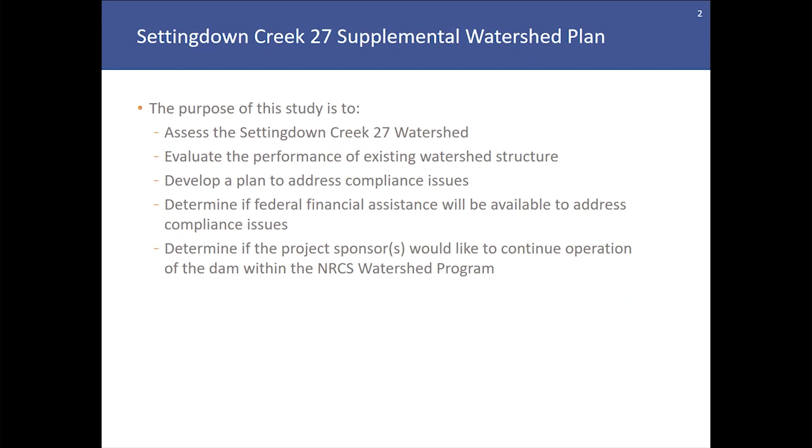As part of the study, public participation is very important. The objective of the public participation plan is to inform the public and watershed stakeholders of the planning effort. The planning study requires a series of public meetings. 2 public meetings have already been held and included a brief history of the NRCS watershed program, a brief history of dam safety, considerations for dam design, operation, and maintenance, an overview of the Settingdown watershed and dams that are included in the study, and the solicitation of questions and comments for scoping topics and project opportunities and concerns.

The second public meeting identified some potential rehabilitation alternatives for the dam. The first public meeting was posted to Schnabel's YouTube channel from August 7th to August 17th, 2020, and the second public meeting was posted from December 18th, 2020 until January 4th, 2021. Please note that the first and second public meeting presentations are being reposted with this third presentation to our YouTube channel for those who are interested in viewing the presentations but were unable to do so during those allotted date ranges described above.

This third presentation will discuss the following topics: a review of the Settingdown Creek watershed and the dams that are included in the planning study, a review of the existing conditions associated with the dam, and the presentation of 3 shortlisted alternatives that are being considered by the planning team. At the end of the presentation, questions and comments will be solicited from you, the viewer, and other stakeholders, and we'll give you instructions on how to do that.

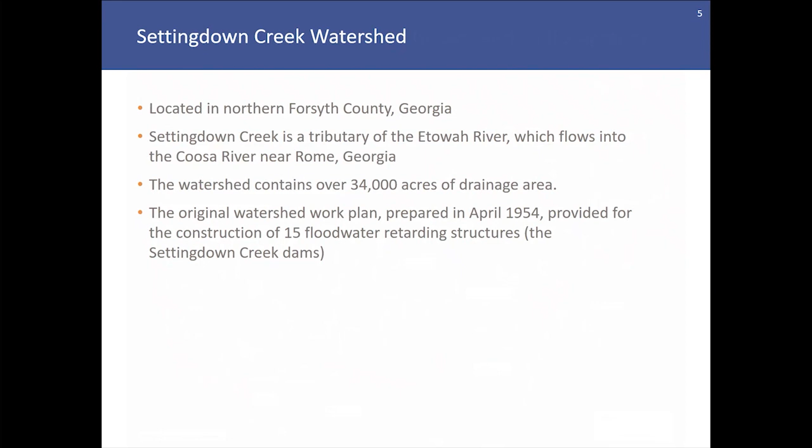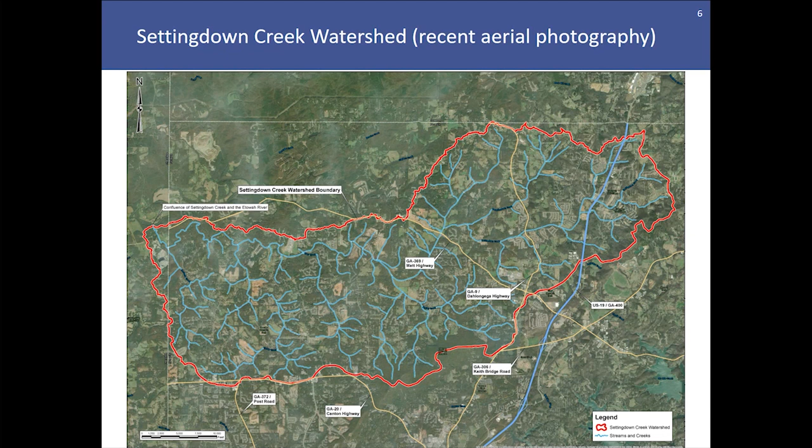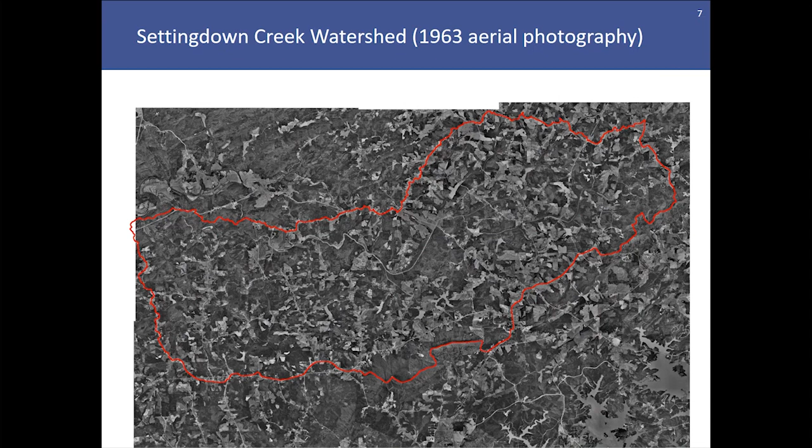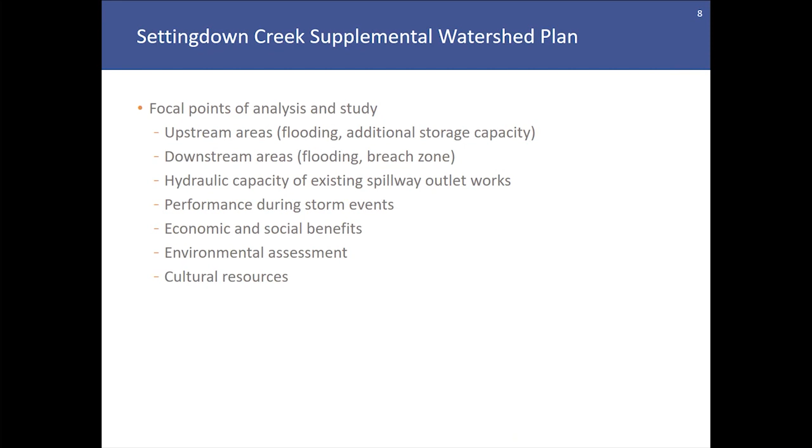As part of the watershed planning initiative, there were several focal points of analysis and study. The planning team looked at upstream areas to assess flooding and the need for additional storage capacity in the lakes. We also considered downstream areas for flooding associated with storm events, as well as hypothetical breaches of the dam. The hydraulic capacity of the existing spillway outlet works was also evaluated for performance during various storm events. An evaluation and analysis of economic and social benefits provided by the dam, as well as an assessment of environmental and cultural resources were also performed.

Some items of note for Settingdown Creek 27. The dam meets Georgia Safe Dams Program criteria to be considered a Category 1 high hazard potential dam. This means that failure or improper operation of the dam would likely result in the loss of human life. The dam requires an operating permit from the Safe Dams Program. Previous assessments indicate that the dam does not comply with current SDP rules and requirements.

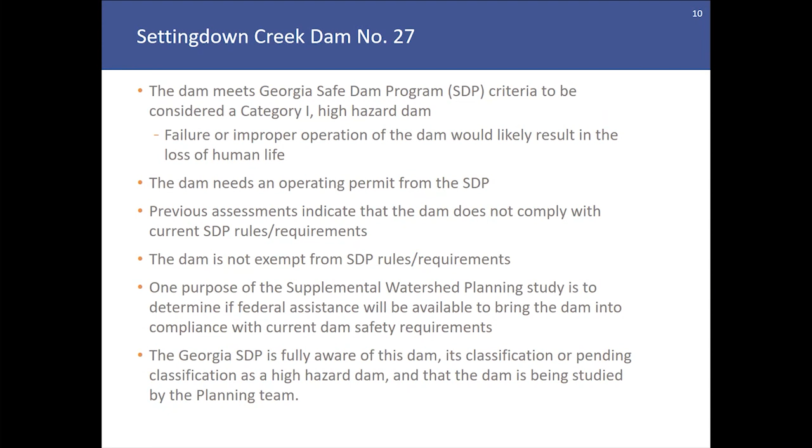The dam is not exempt from SDP rules and requirements, and a purpose of the planning study is to determine if federal assistance will be available to bring the dam into compliance with current dam safety standards. The Georgia Safe Dams Program is aware of this dam, its classification as a high hazard dam, and that the dam is being studied by the planning team.

Some original design features associated with the dam are that it was not originally designed and constructed as a high hazard dam. Some development has occurred downstream since its original construction, which has necessitated an increase in the hazard classification. The dam is a flood mitigation dam, and an anticipated secondary purpose of the dam is sediment accumulation or storage.

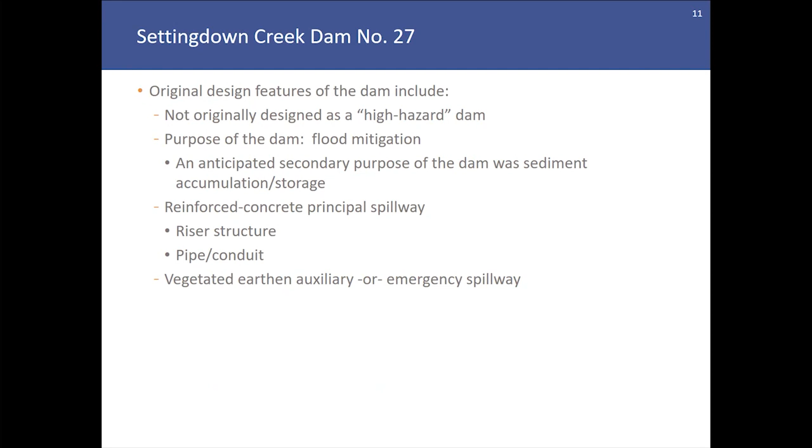The dam spillway consists of a reinforced concrete riser structure and nearly horizontal pipe that conveys water from the upstream side of the dam in the lake through the dam to the downstream outlet channel beyond the downstream slope of the dam. There's also a vegetated or earthen auxiliary spillway channel located near the left end of the dam. And as we'll see in some upcoming slides, Fricks Road, which is a county road, crosses just downstream of the control section of the auxiliary spillway.

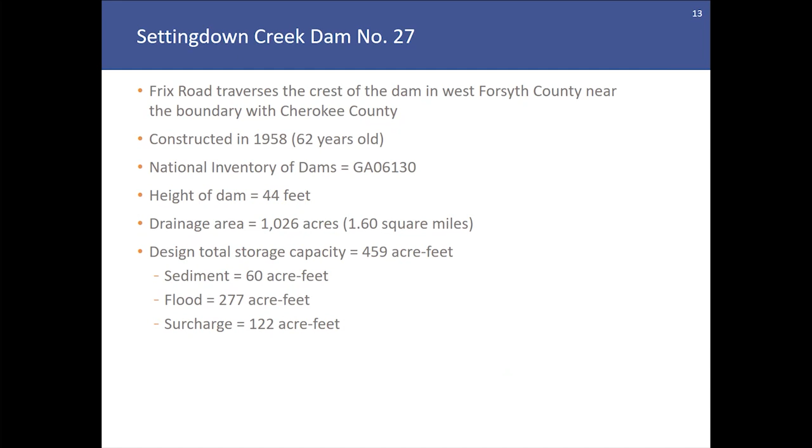The dam appears on the National Inventory of Dams and has a surveyed height of approximately 44 feet. The drainage area to the dam is approximately 1.6 square miles, and the design storage capacity of the impoundment is 459 acre-feet.

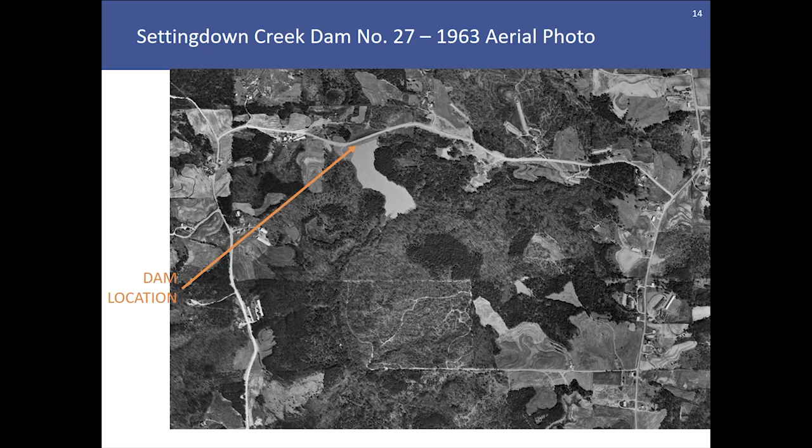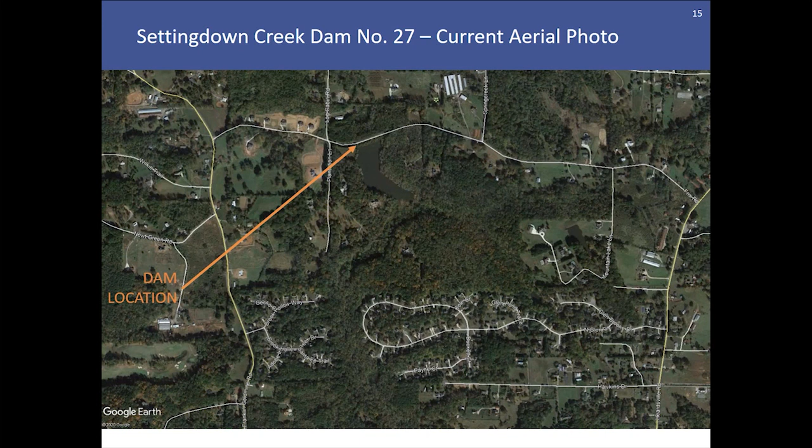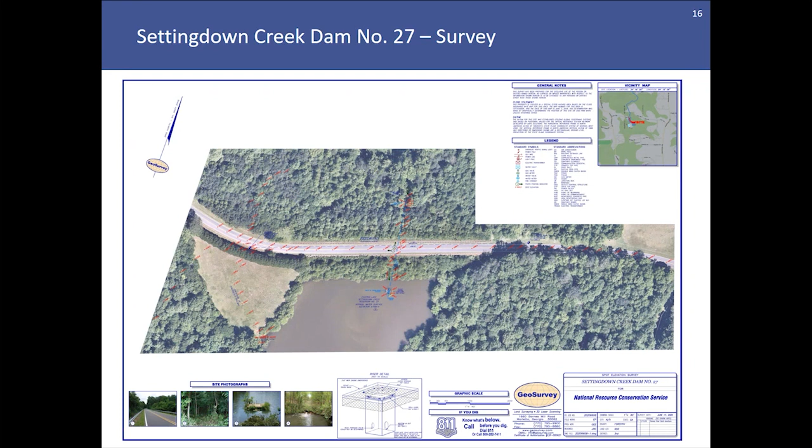The principal spillway riser structure is located in the lake. If you can note the gray rectangle with some survey points located around it. The blue line indicates the approximate alignment of the principal spillway conduit that runs from the lake through the dam to the outlet channel downstream of the dam.

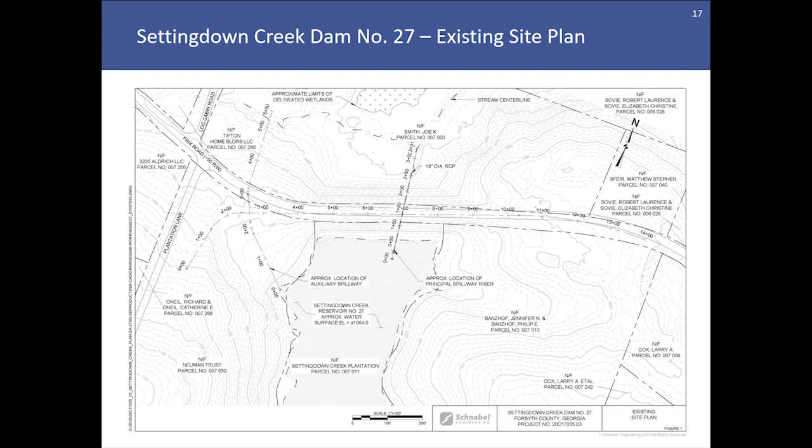This is a site plan with some topographic contours that show the location of the auxiliary spillway, dam, and principal spillway. You can see the location of Frix Road going across the dam and the location of some wetlands that were delineated downstream of the dam. We indicate these wetlands and note that any rehabilitations to the dam or spillway system should not result in impacts to the wetlands delineated near the top of this view.

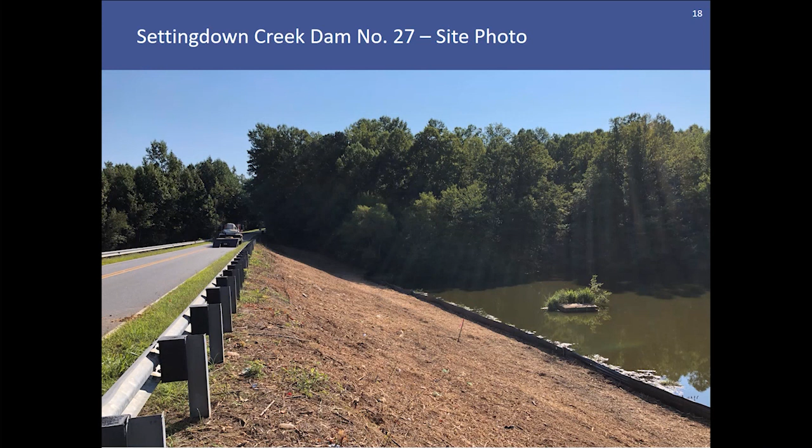Here's a photograph taken from the crest of the dam after the clearing was performed. The upstream slope is in view. Frix Road is at the left side of the view, and the principal spillway riser structure is located in the lake in this view. Note that at the time this photograph was taken, some trees and other woody vegetation were growing out of the riser structure.

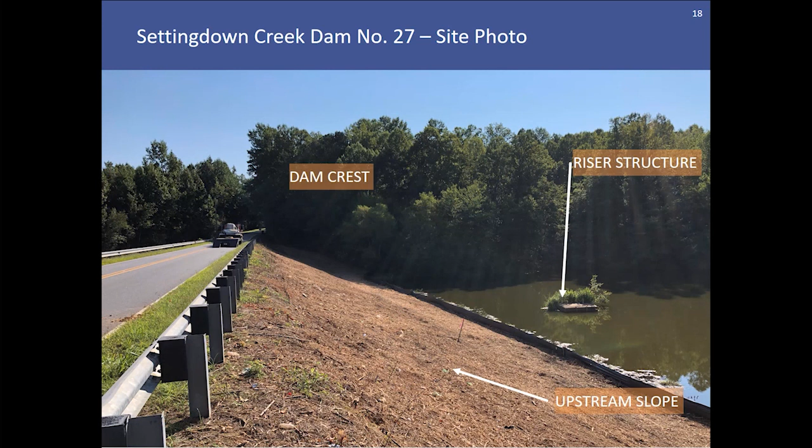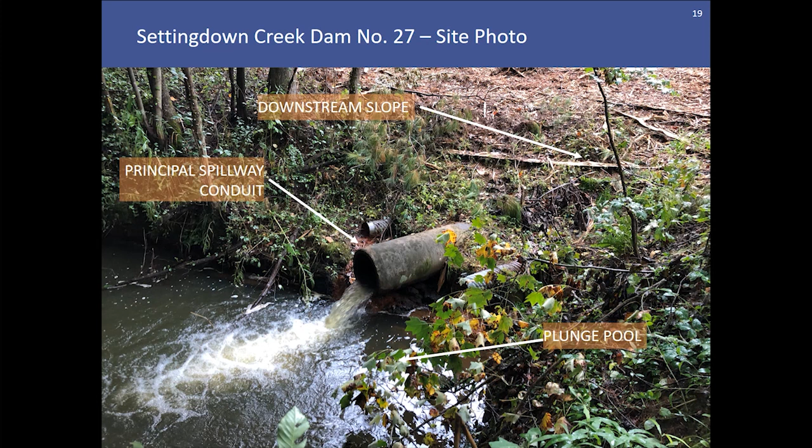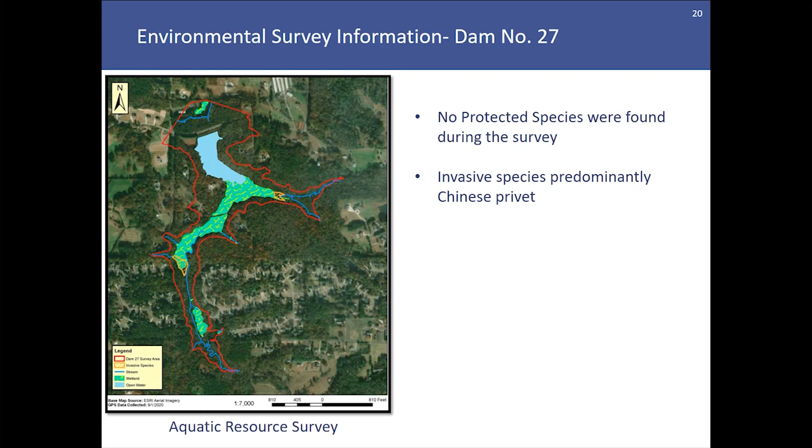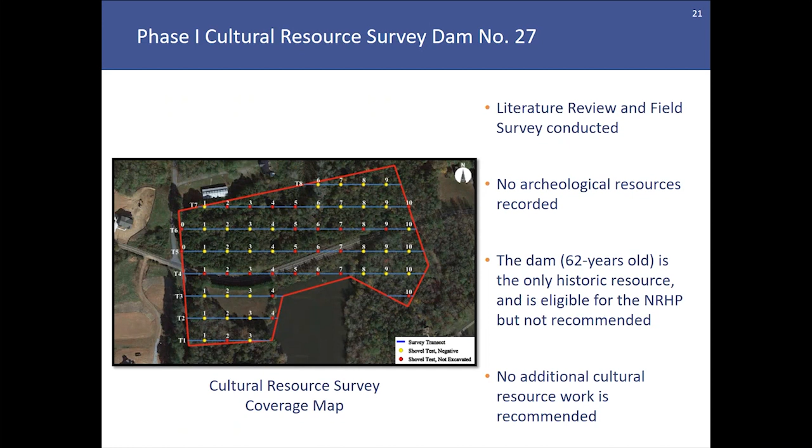The dam, being over 50 years old, is eligible for listing on the National Register of Historic Places, but given that the dam is not a unique structure to Georgia or the United States, nor were any notable feats of engineering performed, listing on the registry is not recommended. The cultural resources team recommends that no additional cultural resources work is required to assess this dam.

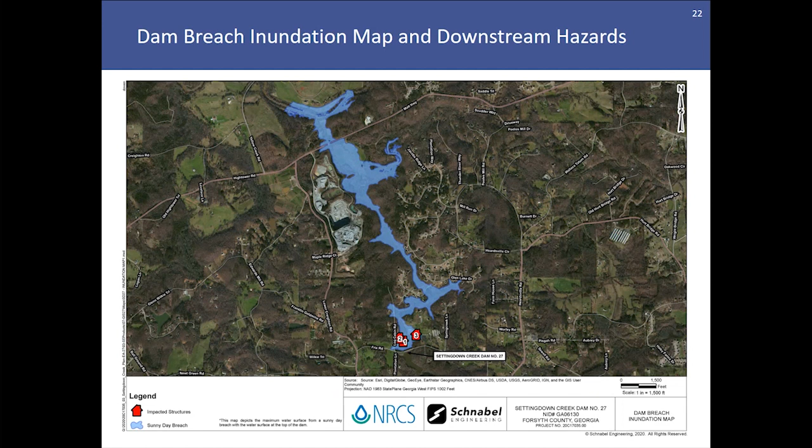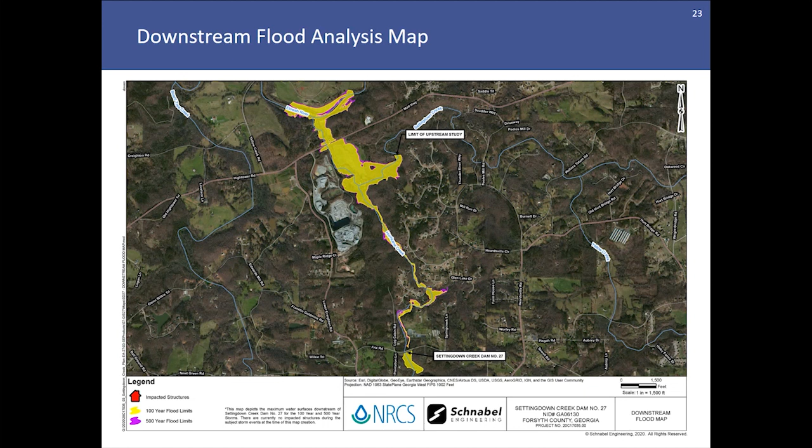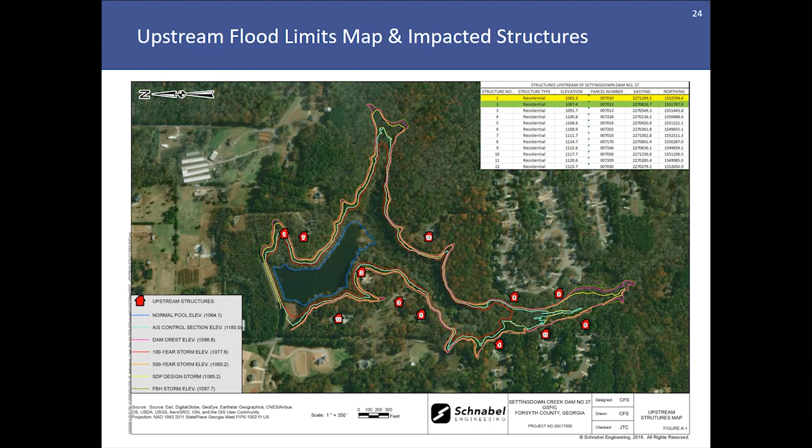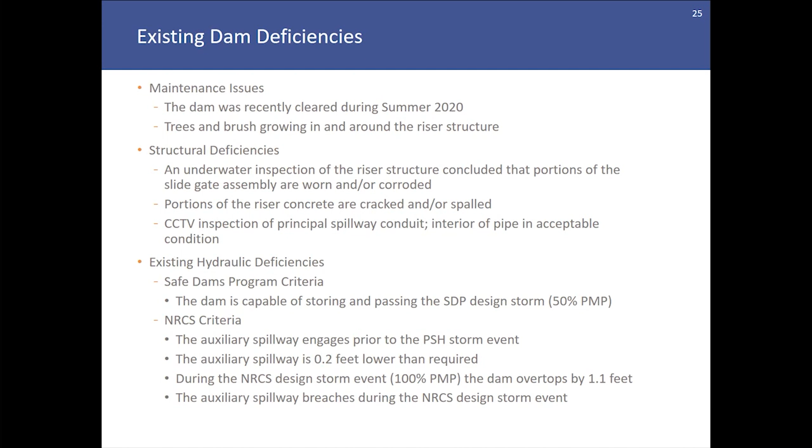The planning team has shortlisted 3 alternatives, which will be discussed in the remaining part of this presentation. The first will be a no action alternative that would assume rehabilitation of the dam to Georgia Safe Dams program criteria and no federal funding necessary or required associated with that option. This option would be the least expensive of breaching the dam or rehabilitating the dam to state criteria.

A decommissioning alternative is required for evaluation as part of the planning study. This would involve permanent removal of the lake by taking out the dam and stabilizing the lake and footprint of the dam after removal. There's also a need to consider impacts to downstream areas with the removal of the dam.

Finally, a future with federal investment alternative, which would be a full NRCS rehabilitation, will be presented. This would involve changes to the embankment, removal and replacement of the principal spillway riser structure, and the decommissioning of the existing auxiliary spillway and construction of a structural auxiliary spillway. As the NRCS rehabilitation alternative was developed, consideration of upstream non-flood controlled ponds and uncertainties with climate change were also considered.

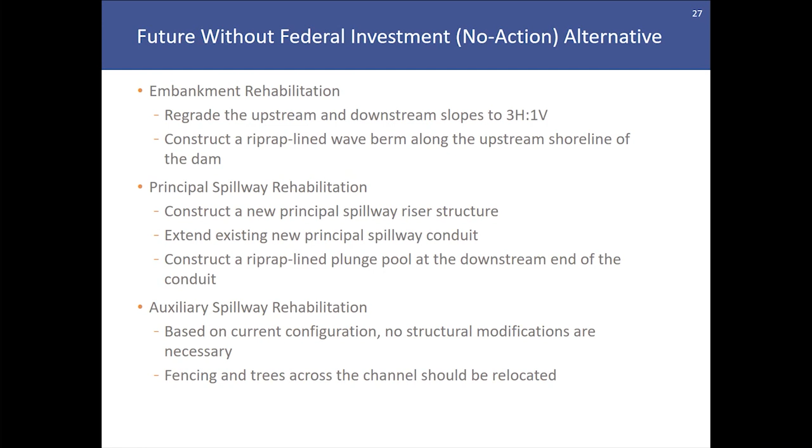However, between stations approximately 200 and 300 on the center line of the dam, trees and fencing that run adjacent to Fricks Road are creating an obstruction of potential flows through this channel, and some consideration will need to be given to relocation of those trees and fencing to remove the obstruction.

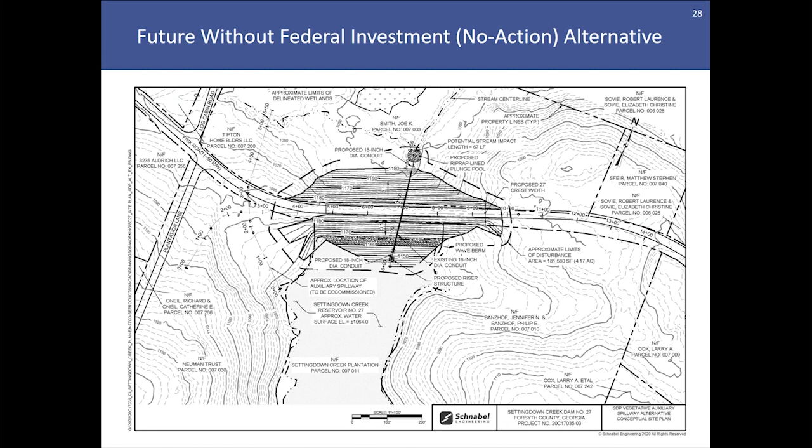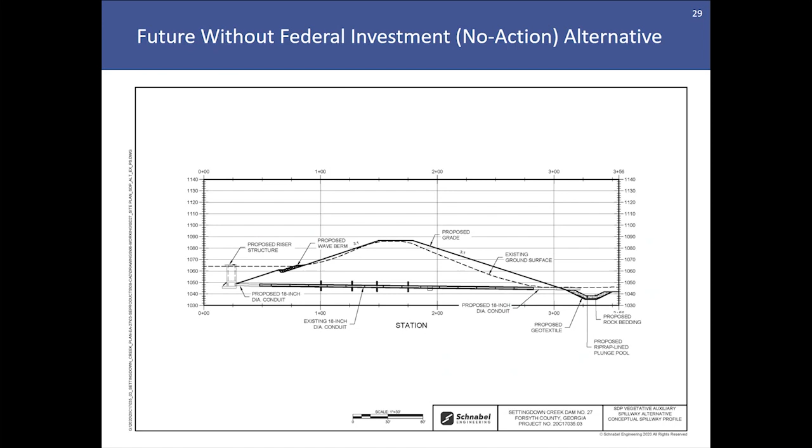Here's a profile view of the proposed improvements to the principal spillway system. As you can see, a wave berm would be constructed on the upstream slope of the dam to accommodate the riprap lining for the wave berm. The principal spillway riser structure would be relocated slightly upstream, and the principal spillway conduit would be extended both in the upstream and downstream directions to accommodate some of these improvements to the embankment and spillway system.

A decommissioning alternative would result in the permanent draining of the lake and removal of the existing embankment structure. This process would involve reconnection of the floodplain to the original grades prior to the construction of the dam, stabilization of the lake bed with permanent vegetation, and stabilization of the primary channel through the footprint of the old dam where stream flows would flow on a regular basis. In addition, consideration to decommissioning the dam would also involve keeping Fricks Road in service. And to do this, the installation of a bridge or a large culvert system would be required.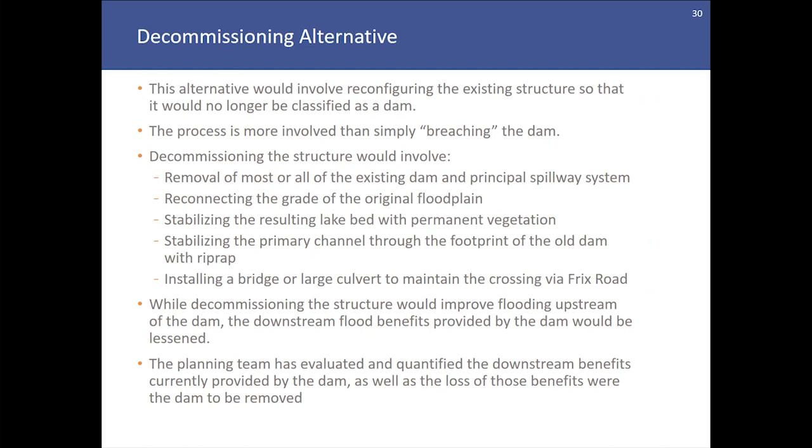Decommissioning the structure would improve flooding upstream of the dam, but the flood benefits downstream of the dam would be lessened or lost. As part of the planning study, evaluations of the downstream benefits currently provided by the dam, as well as the loss of those benefits, have also been considered.

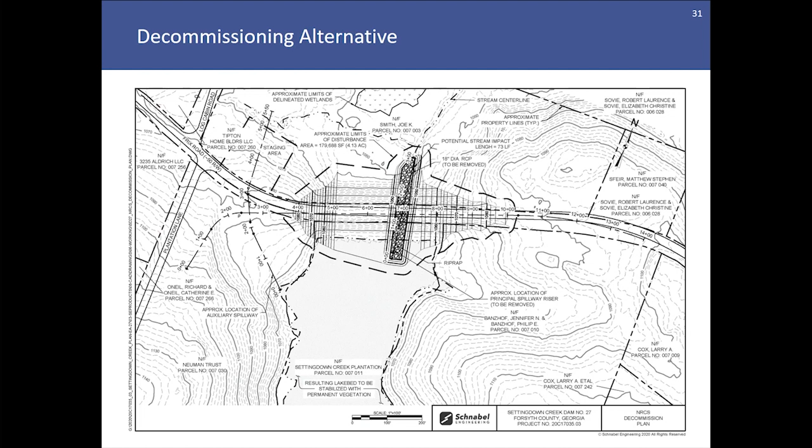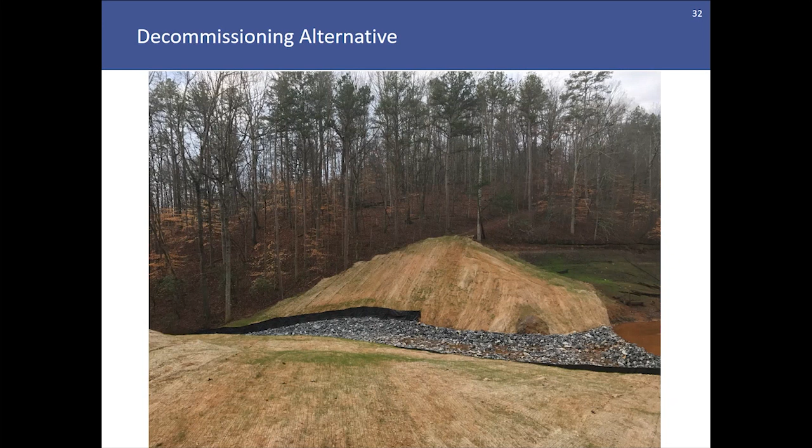Here's some examples of what a decommissioning alternative would look like. You can see that portion of the embankment would be removed. In the case of the decommissioning alternative, the entirety of the embankment will be removed, and the slopes would be laid back. In the case of Settingdown 27, a bridge or culvert system would have to be constructed to keep Frix Road in service. And you can see the riprap lining that would be involved where flows would occur on a regular basis.

The final alternative that we'll discuss in this presentation is the future with federal investment. This would involve a full rehabilitation of the dam to NRCS criteria and would involve raising the crest of the dam to the current maximum water surface elevation associated with the design storm event, regrading the upstream and downstream slopes to 3:1, constructing a riprap lined wave berm along the upstream shoreline of the dam, and decommissioning or closing off the existing vegetated auxiliary spillway.

The principal spillway riser structure would be removed and replaced with a new structure, and the principal spillway conduit will be extended into the lake slightly further and also in the downstream direction. A riprap lined plunge pool would also be constructed at the downstream end of the principal spillway conduit.

The structural spillway for the auxiliary spillway system would consist of a 90-foot wide reinforced concrete labyrinth crested chute spillway. This would have 3 labyrinth cycles, and this spillway is what would be required to pass the flows associated with the more intense NRCS storm event.

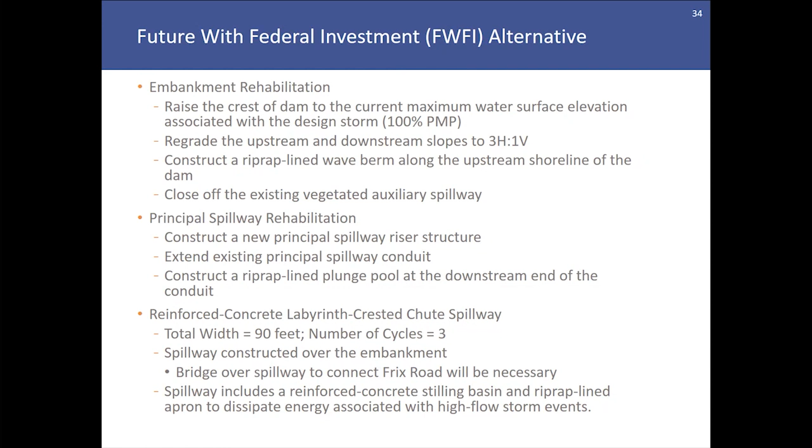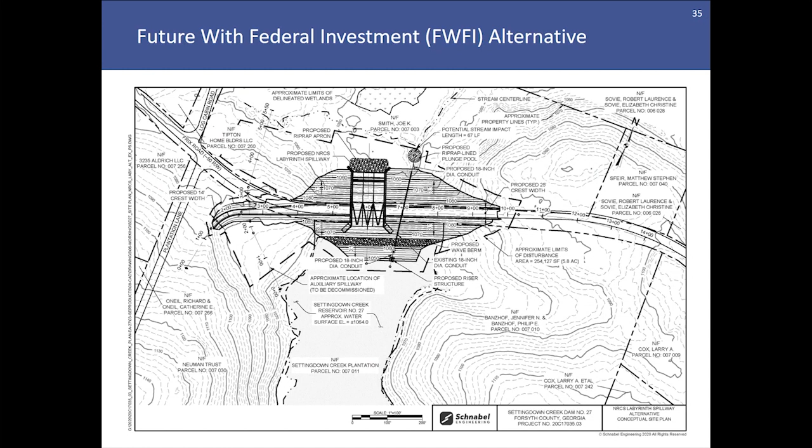This site plan shows the layout of the future with federal investment alternative. As you can see, the auxiliary spillway at the left side of the view would be filled with compacted earth fill up to the dam crest elevation, and the labyrinth spillway would be constructed over the embankment. This alternative would require Frix Road to be closed for a significant number of months while the work was being performed, and a detour would be required until the construction of the spillway and bridge were completed.

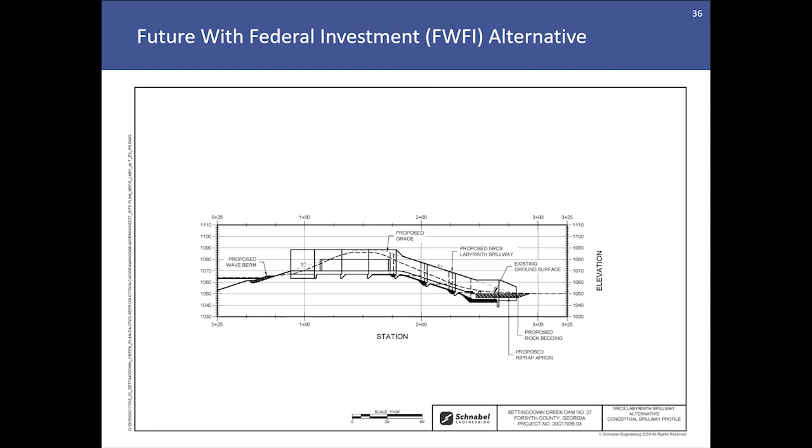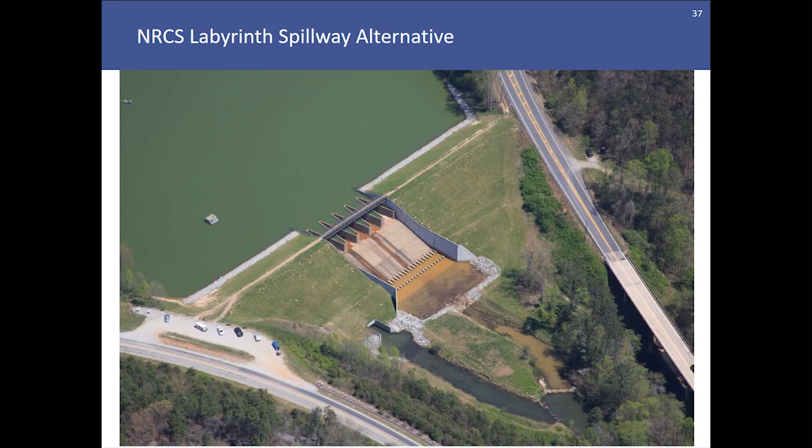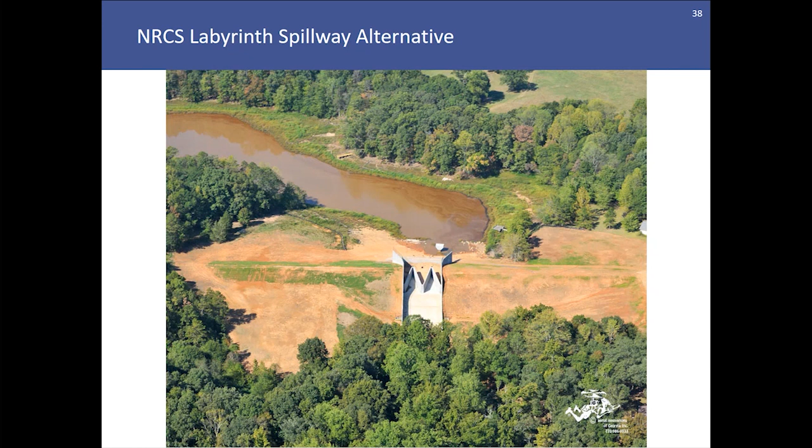So as part of the planning process, the planning team has had several meetings with project sponsors and representatives of the state NRCS office. And as a result of those meetings, the locally preferred alternative for the dam is presented as the future without federal investment alternative, or no action alternative. The dam and spillway system currently are capable of meeting the hydraulic and structural requirements associated with the Georgia Safe Dams Program design storm event.

So modifications and improvements to this dam would include regrading the upstream and downstream slopes to a uniform 3-to-1, constructing the riprap lined wave berm along the shoreline of the dam, removing and replacing the principal spillway riser structure, extending the principal spillway conduit, and installing a riprap lined plunge pool at the downstream end of the extended conduit.

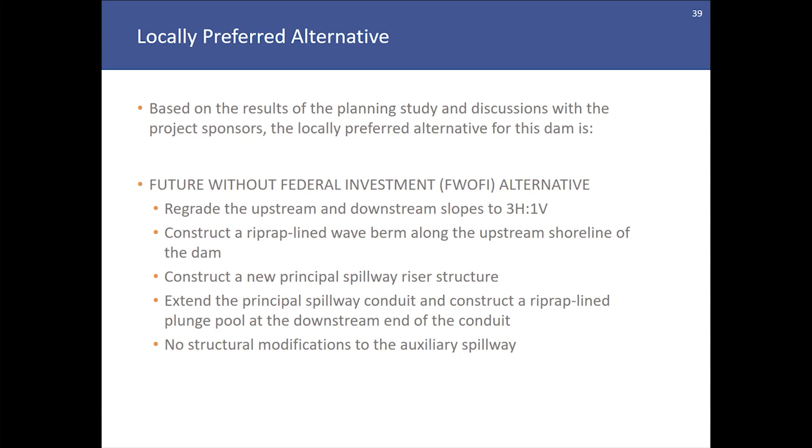And as stated previously, there's no structural modifications needed to the auxiliary spillway. However, the Safe Dams program will likely require the relocation of the trees and fencing that are currently located across the auxiliary spillway channel to bring that spillway into compliance with their standards.